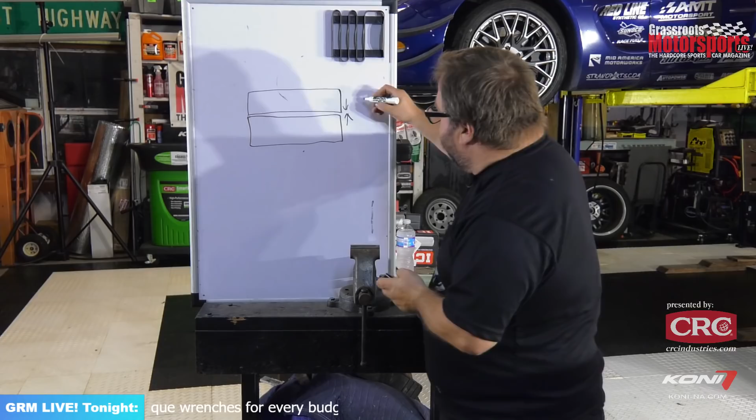I apologize in advance. The fact that I am writing things tonight is going to get fairly embarrassing for anybody that ever taught me penmanship.

So we need a certain amount of clamping force between these two parts. The trick is we can't really measure clamping force between two parts. It would require us to put some sort of measuring device in between those two parts, and you can't have that. Those two parts need to mate with each other. So how do we extrapolate clamping force?

Well, we can use the amount of torque we are putting on a threaded fastener, since we know if we've got a threaded fastener going through a hole here, our threads pulling this bottom part up towards the top part, we know based on how much torque we put on that fastener, how tightly those parts are being pulled together, within certain limitations. There's lots of variables that go into this. So having precise control or precise knowledge of the amount of torque we're putting on a fastener is paramount, because there are so many other variables.

First off, the amount of torque you put into a fastener, most of it in most cases is going to be lost to friction. I'm talking, when I say most of it, like a dirty fastener, a rough surface fastener, unlubricated - 60, 70, 80% of the torque you put into that fastener could be lost to friction. Only 10 to 15% of it could be going into clamping force. So that's not a great ratio.

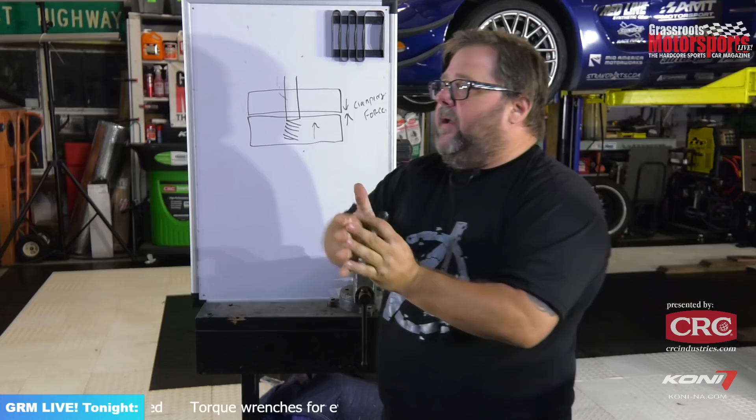Let's talk a little bit. Yep, a lot of folks saying hi, tuning in there. Kevin says lube it up. Yeah, it's never a bad idea to lube it up.

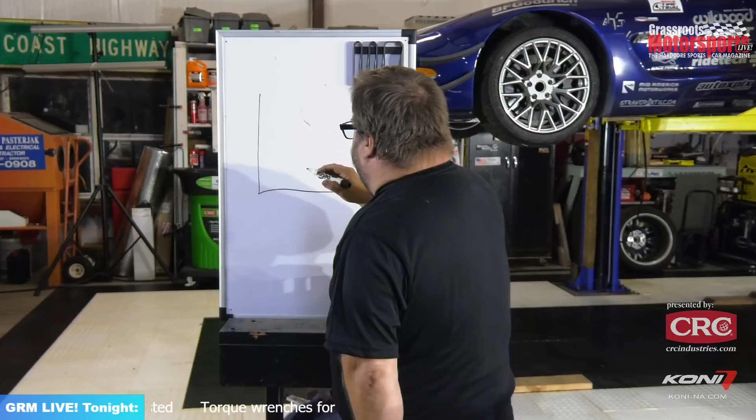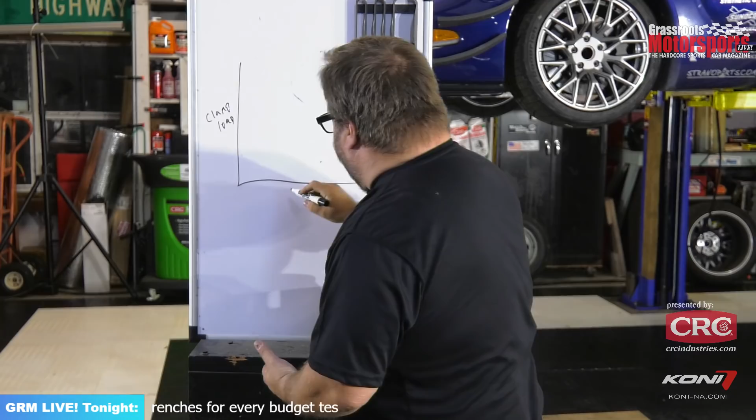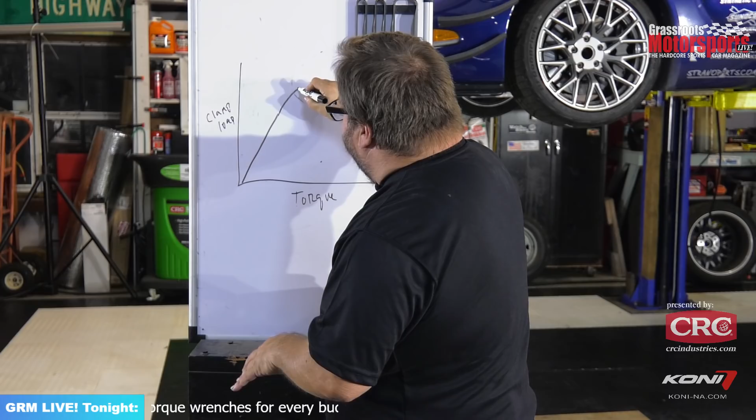So let's do a really quick review on how fasteners fail and what we're talking about when we're talking about torquing a fastener to a certain spec. So if we look at a graph, just an XY graph, where we have clamp load up here, and we have torque on the fastener here. Most threaded fasteners are going to have a curve that looks something like this. It's gonna rise fairly evenly, torque and clamp load, to a certain point where it's going to start to trail off fairly evenly. Then it's going to trail off dramatically. Then it's going to break.

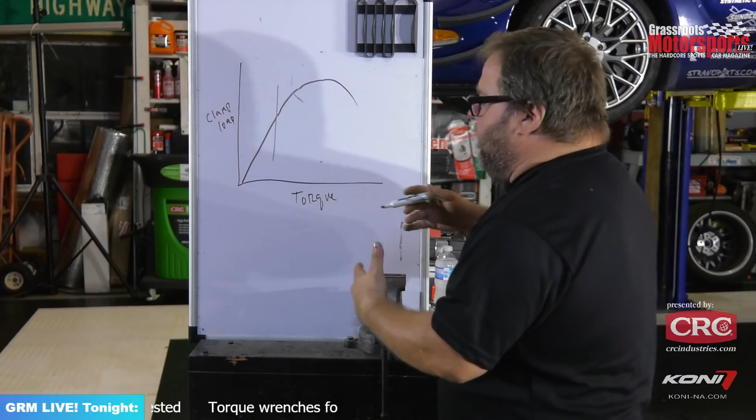So here's what's going on in these different areas. While it's rising in a linear fashion right here, while we're increasing clamp load and torque, both in a linear fashion, there's no real stretch going on in the bolt. Remember, everything is a spring. Where'd my bolt go? Everything made of any kind of material is a spring. Everything moves, everything bends, everything stretches. Everything is going to have a certain amount of elasticity to it. But in this area here, while torque and clamp load are rising the same way, there's no stretch going on that can't be recovered from.

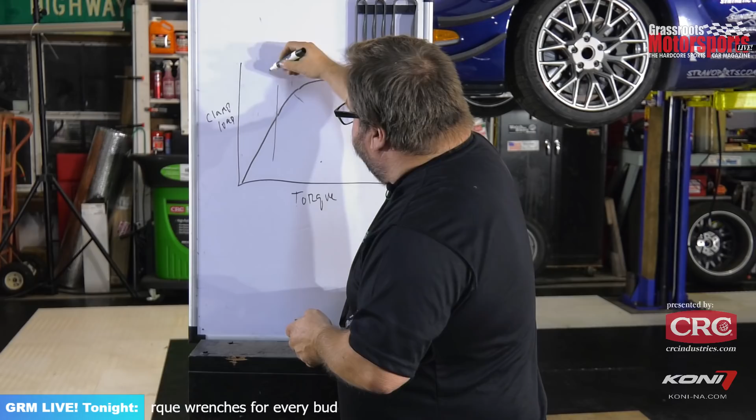So you're going to basically torque this to what's called a proof load, which is a load at which, when you remove the tension from that fastener, it'll return to its original shape. What's going to happen after that is you're going to be applying more torque to it, but your clamp load will still be rising, but the amount that your clamp load rises is going to be less and less for a given torque. What's actually happening at that point is the fastener, the bolt, is stretching, it is deforming, it is plastically deforming, and when you increase it past that proof load, you get into this area of plasticity from which that fastener is not going to recover.

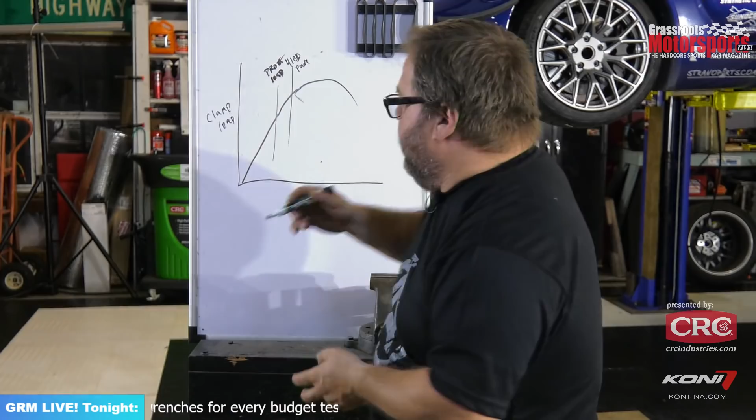You will stretch it to a point where when you remove tension from it, it will not recover, and eventually you're going to torque this past the point where this is basically the yield point, which is the point of no return for the bolt stretching past a point where it can't return to its original shape. And then you'll apply more and more torque to it, and eventually it's just going to snap. It's gonna eventually meet its failure point. So that's essentially your curve.

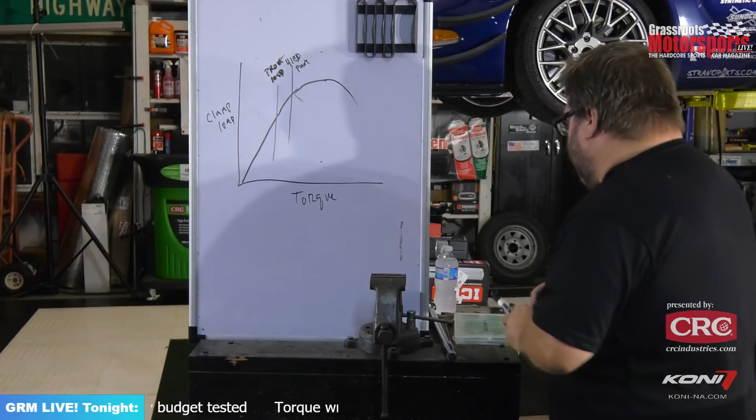Usually this proof load is going to be about 85 to 90% of the ultimate yield point. So there's a little bit of safety margin in there for being able to reuse a bolt. But again, understand that if you are reusing a bolt, understand how much torque was on that bolt, how much stress you put on it. If you exceed this proof load on the bolt, don't use it again, or don't use it again in a mission critical application. Time to replace that bolt the next time you use it.

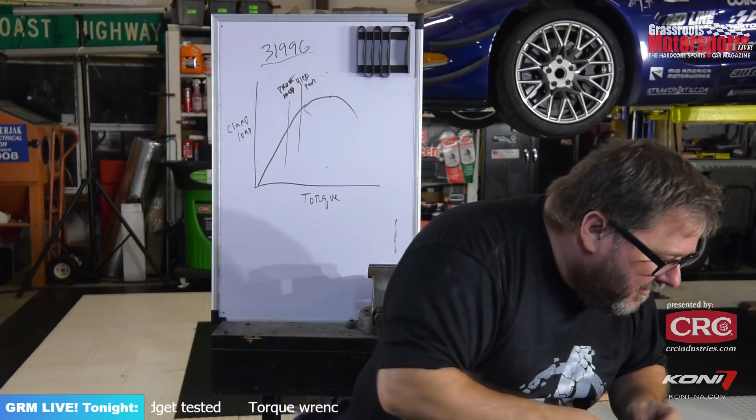Okay, let's get caught up on some of our questions here. It's mostly smart ass remarks, but we have a lot of them, yeah. Dinesh mentioned that'd be a good lesson for all those teenagers working at Jiffy Lube using impact guns on oil drain plugs.

Yeah, it's important. As I started researching for this show, I was realizing just how important it is to torque to a spec, because your torque is a second order calculation for clamping load. You're just extrapolating clamping load through torque. So the more you screw up torque, it's going to have magnifying effects on the thing you're actually trying to measure.

All right, so let's get into some of these wrenches.

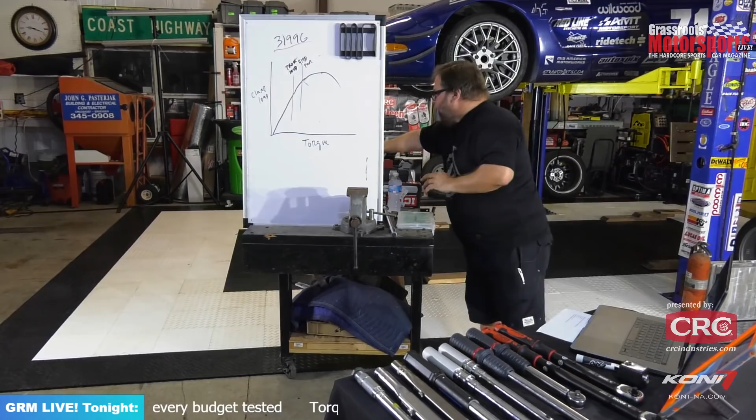I see Jesse Spiker is watching. Jesse, we are taking good care of your Precision Instruments wrenches that you loaned us for the evening. We'll get to those in just a few minutes.

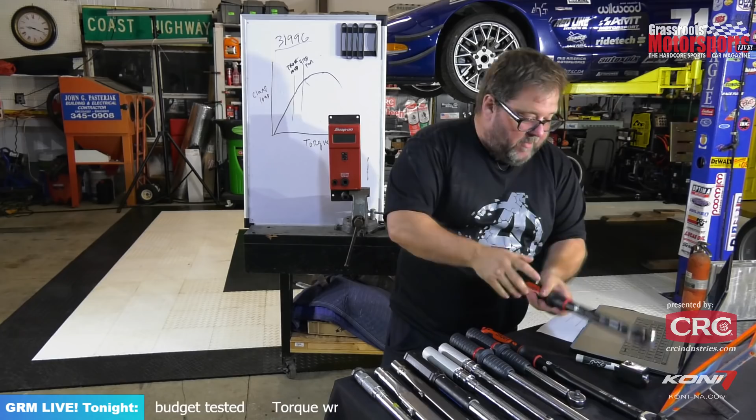But let me run you down the lineup of stuff we have for you tonight. We'll get our test doohickey in place. We've got wrenches from about 5 different brands here, starting out with some from Sonic Tools.

These we've chosen, for the most part, 3/8 and 1/2 inch torque wrenches for all these examples. Let me get my handy dandy information sheet out here so I am quoting you actual numbers. Sonic 2-way torque wrench, 3/8 inch, 20 to 100 Newton meters, is 180 American dollars. Sonic 1/2 inch, 40 to 200 Newton meters, $190.

USAG is the next brand. These are available through Griot's Garage. USAG is an Italian company and makes a lot of high-end tools for motorsport over in Europe. These are through Griot's Garage, 3/8 inch, $269.99. For the 1/2 inch, $274.99 for the USAG.

We'll get into some of the features of these individual wrenches as we go through. I just want to run down what's here.

Next up is a brand called Icon. You may have heard a little bit about these. This is Harbor Freight's premium brand, their high-end brand. They are actually trying to compete with some of the commercial grade stuff. The 3/8 version of this Icon wrench at Harbor Freight is going to run you $89.99.

I know that because I just bought this one 2 days ago. And the bad news is you cannot use those great 20% off coupons from Harbor Freight on these, as it's one of their premium house brands. But it's a nice feeling wrench, and we'll give you the test results on those. The 1/2 inch Icon from Harbor Freight is $99.99.

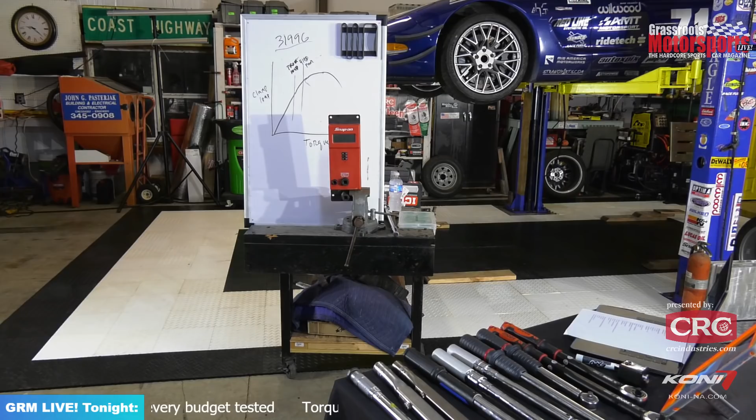What you see there is a spring, and the spring is holding, sometimes a detent ball, sometimes a square edged piece of material, and there's a secondary hinge on the device right here. That's what this pin is for. It's actually internally hinged, and that hinge is based on the tension of a detent ball or detent pin that you have to overcome torque to break free.

So that's why you get the click. It actually momentarily releases the torque from the wrench when you overcome the torque of that detent ball. So when you adjust it, all you're doing is preloading that spring. The good news is that also makes it fairly easy to recalibrate these.

You put a different weight spring in, you shave the balls down a little bit, you polish off the end of the detents. Probably it's mostly by shimming or replacing the spring, but that's how a clicker style torque wrench works.

Now here is how a split beam style torque wrench works, which is what these Precision Instruments ones are. Same concept, you're essentially overcoming mechanical leverage to release the head of the wrench.

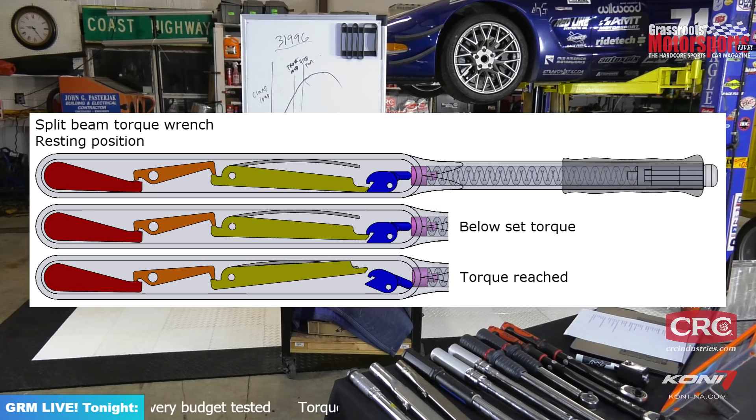There's a few different designs, but the split beam style uses, instead of just a single beam hinged at the head, multiple beams that actually amplify the torque a little bit, and the result is much smoother operation when that finally breaks free, and much less preload on the spring.

So these Precision Instruments split beam style have just a very easy adjustment. It's almost like winding a watch. It's very easy to adjust the torque on them.

Is one better or worse than the other? The real answer is they're both pretty good at what they do. It's really going to come down to the precision and the assembly of the pieces involved. There's different ways to skin a cat, it's just how sharp is your knife when you skin that cat.

All right, we are going to take a quick break here, by which I mean I'm going to still be standing up here, I'll just be talking about different things for a couple minutes. When we come back, we're going to actually test some of these, and I will come to some conclusions on which of this particular lineup we have in front of us I would maybe spend some of my own money on.

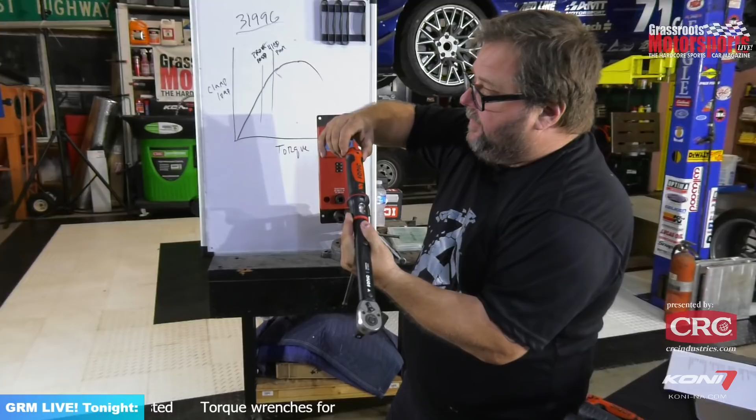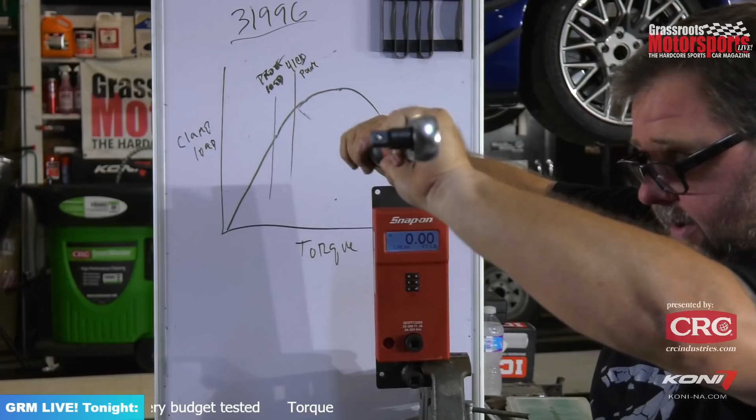Let me show you how we test these. Put a little adapter here. I'll set this to show you how the lock works. Sonic is very easy to adjust: pull out the lock, twist the preload handle to whatever torque you want. It's a little tricky to read. If I had to nitpick it, I'd say the gauge on this is a little tricky to read.

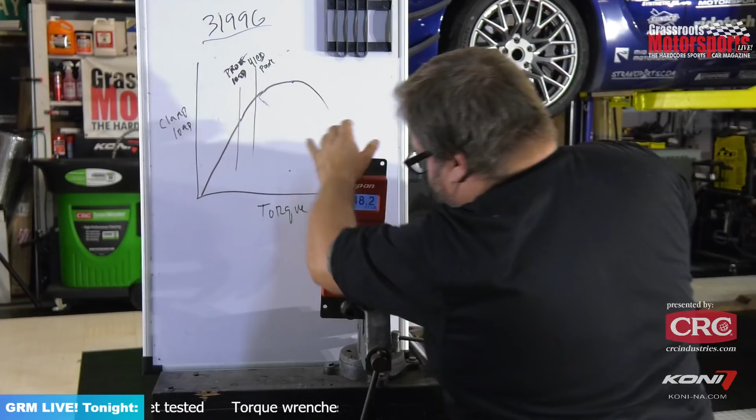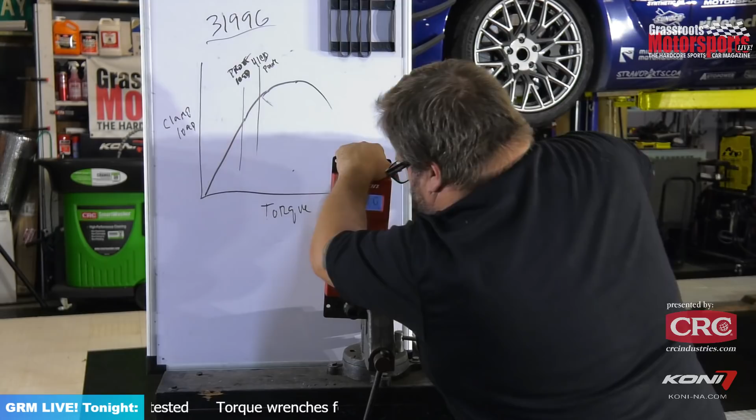But it does seem well weighted and lines up nicely, so we'll set that to 50 pounds, insert it in there, and twist it till it clicks. Set to 50 pounds, we got 49.4, then 48.2 — I think we missed on that one. We'll wait till it recycles. We got 48.1, then 48.1 again. So we're very, very repeatable, but actually a little bit lower than what we were measuring last night when I was doing the testing.

What are the variables involved in that? Well, temperature is possibly one — it's a little cooler now than when I was testing last night. We're seeing about a 0.5%, almost a full percent difference in some readings compared to last night when it was 15 to 18 degrees warmer. So there is some variability in there.

A question we get frequently, and one thing people kept asking me as I was researching this: does it matter if I put an extension on there? Does it matter if I put a universal on there? I'm no engineer, but in the limited testing I did, there doesn't seem to be a big difference in what we saw.

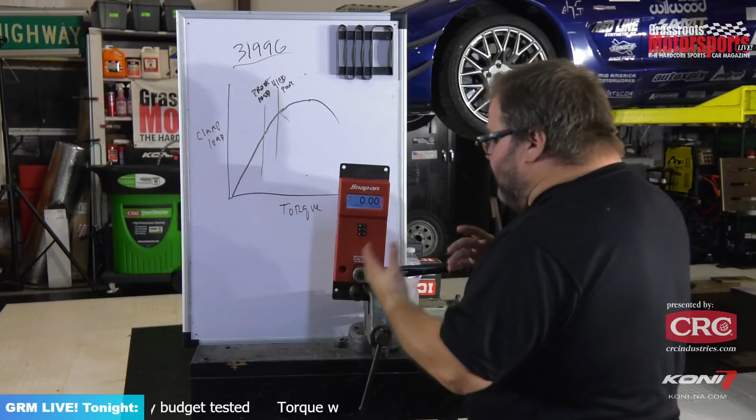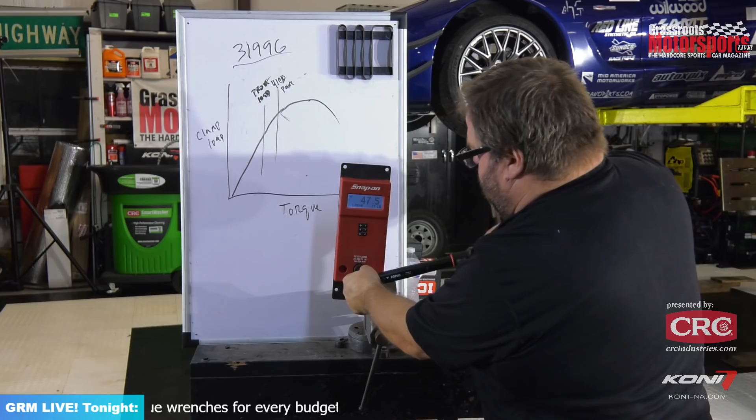So first, let's grab about a 4-inch extension here and put it back in. It misses every once in a while, but we got 48.1, which is exactly what we were coming up with using just the wrench itself. So we're within margin of error with a 4-inch extension.

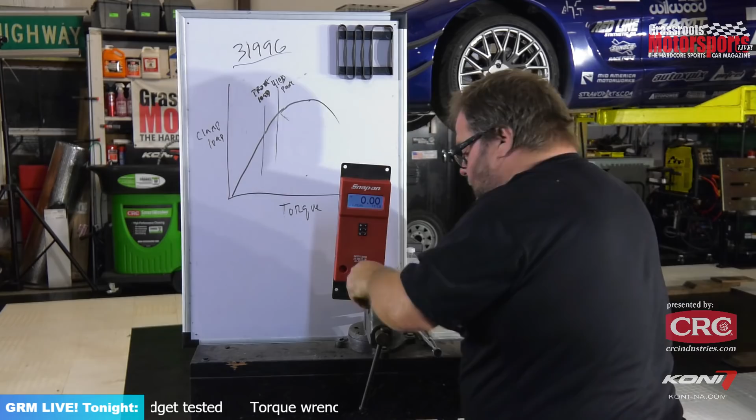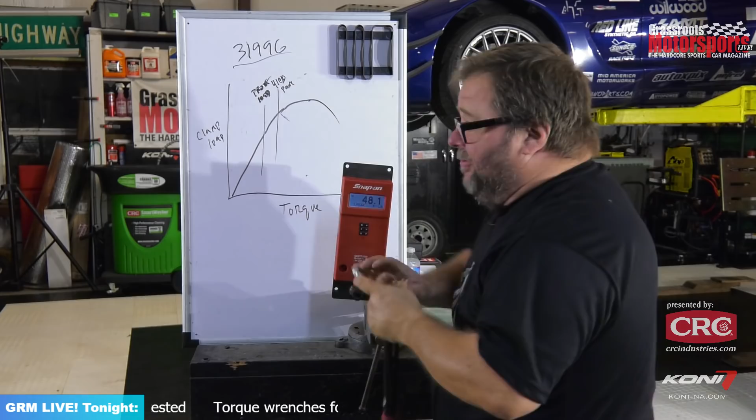Now I'm going to add a universal to it. Oop, or maybe not. Get on there, you piece of crap. Okay. So that's with a universal and an extension, and we're seeing essentially the same numbers: 49.1, 49.3, 48.1. So to answer your question, does it matter if you put a universal and an extension on there? Maybe not so much.

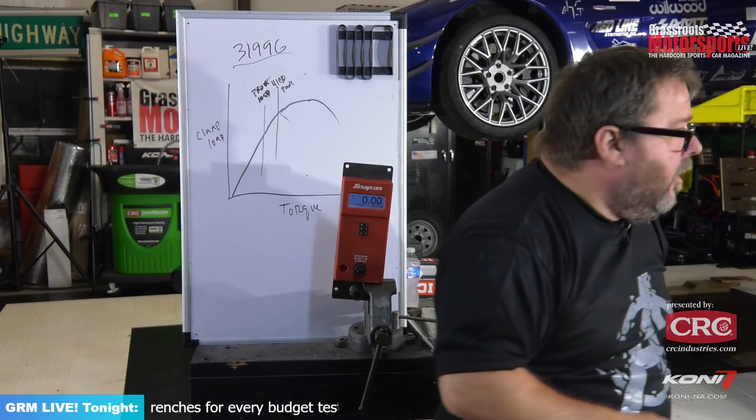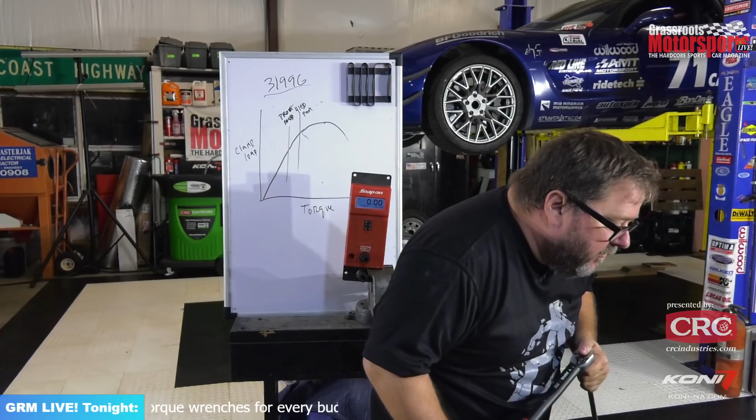Let me grab an even longer extension — I'll get the longest one I have in the drawer. Benjamin says from a static perspective, no, it shouldn't matter as long as it's straight — the moment arm remains the same. So basically, as long as everything stays straight and the angle is exactly the same, none of what you put on there should matter to your ultimate torque.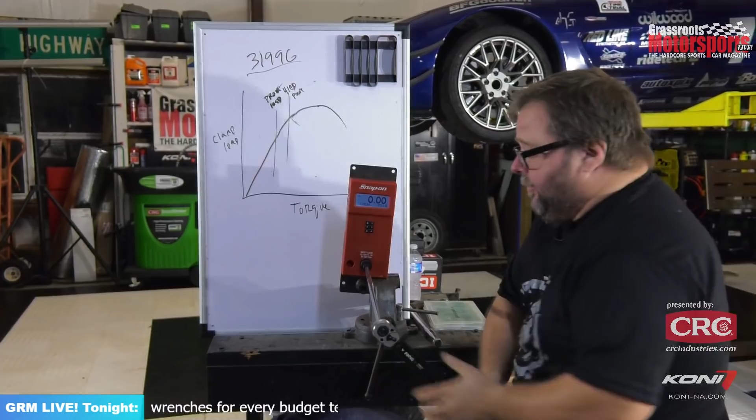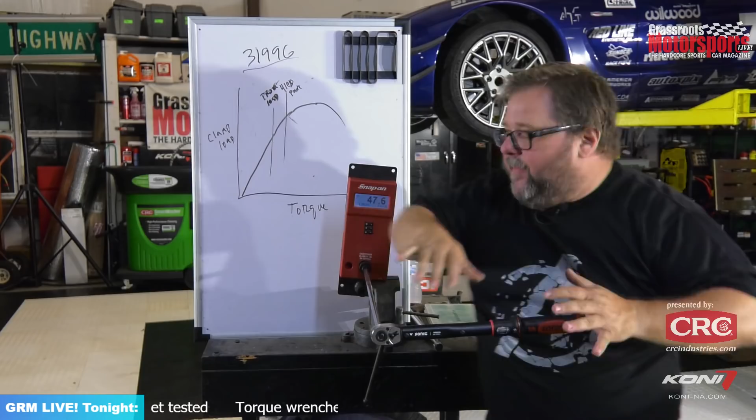Here's what it does matter to, though: it matters very much to feel. With an extension this long, like a 14-inch extension, the amount of flex you get before the wrench triggers is considerable, so timing that release point becomes fairly critical. You have to sneak up on it and then hit it. You can see we're varying here on our readings — that's not really the wrench, that's more me than the wrench. It's taking some feel.

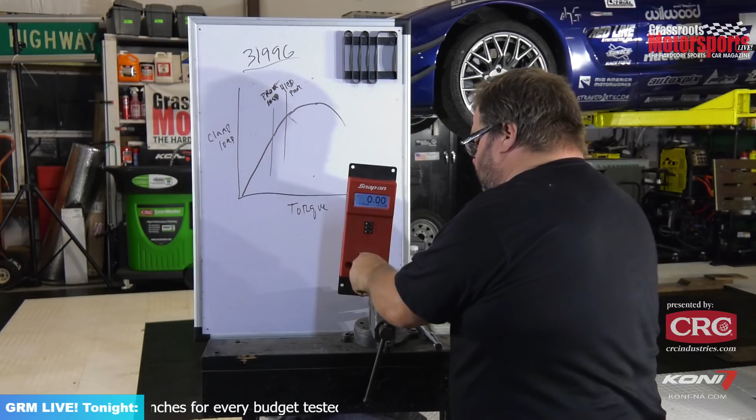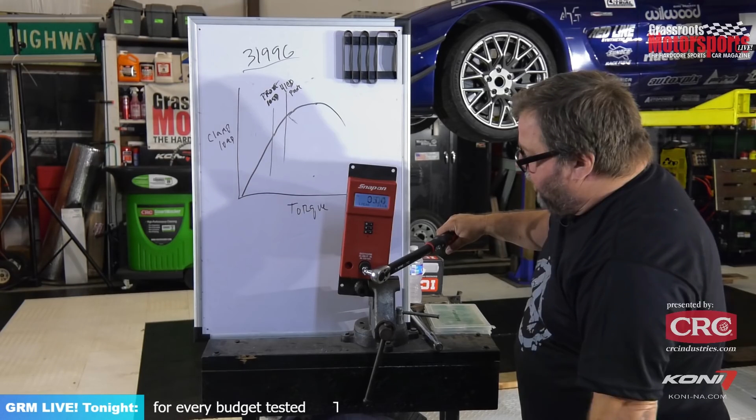Where it is going to matter is when we start creating angle with a universal. So let me get our universal stuck back in here, and if we put this at about a 45-degree angle, you see how much we lost right there — we lost almost 30% at a 45-degree angle.

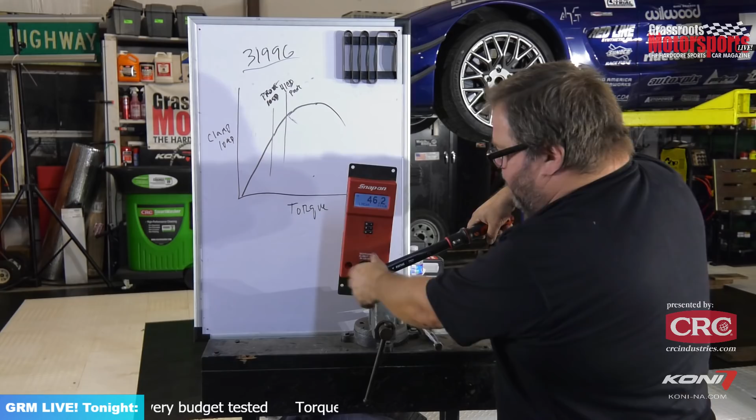We'll eyeball this to about a 10-degree angle, see what we lose. Less, only about 8 or 9% at a 10-degree angle. But considerable at a 45-degree angle.

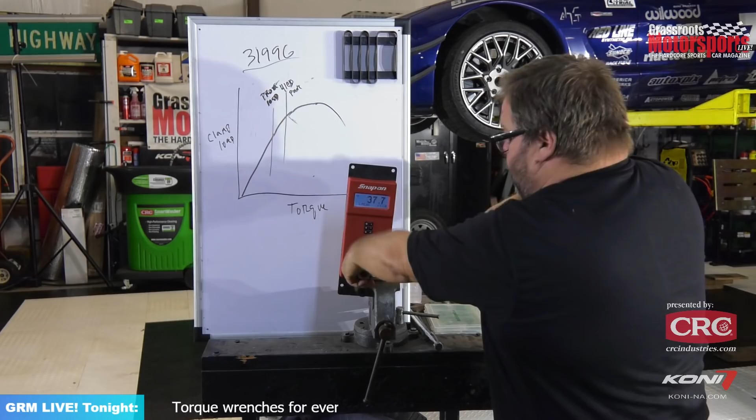So does all this crap in the middle matter? If you start changing the angle, yes, it absolutely does. If you don't change the angle, mathematically it doesn't matter.

From a user perspective, yes, there definitely are effects when you start using this stuff. So that was our test methodology for all these. I'm not going to walk you through testing on every single one of these wrenches, but I am going to go through the rest of these wrenches and some of the features very quickly.

The Sonics, both of them, like we mentioned, great locking mechanism at the end, very, very difficult to adjust it accidentally. It's kind of hard to pull that out with the heel of your hand if you're using it. Very positive lock. Also, really, really cool feature, reversing anvil on the head there.

So why does that matter? Well, a torque wrench will generally have different readings whether you're torquing something clockwise or counterclockwise. And you're not going to often torque something counterclockwise unless you've got reverse threaded bolts. But most torque wrenches are not calibrated in both directions to an equal amount. If you look at the specs on many torque wrenches, they'll be accurate to within a certain standard clockwise, possibly a different standard counterclockwise. This lets you basically torque accurately in both directions. You just reverse where the anvil comes out of the head. So, nice little function there.

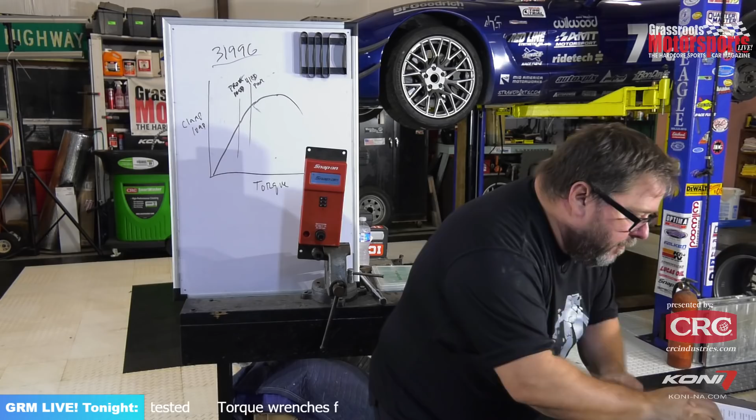Great point there, Steve. Steve Goff posted that torquing in reverse is important for testing stuff like breakaway torque. So yeah, when you're doing reliability testing, if you're rebuilding a differential, torquing in both directions becomes important for that.

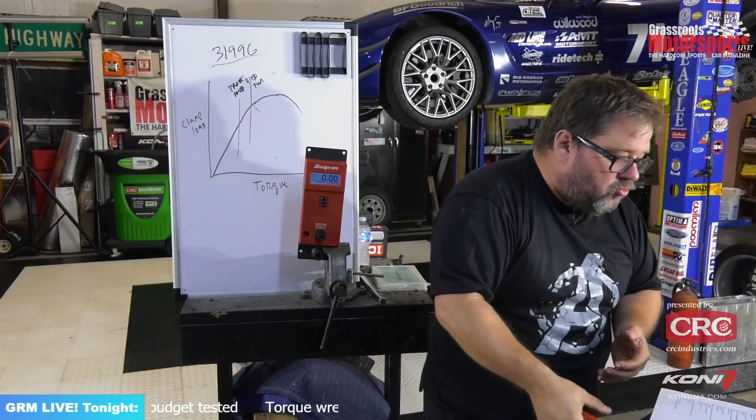Okay, see where we're still at. The half-inch Sonic, where were we at in price for that? $190 for the half-inch Sonic. Very much like the 3/8, features are all the same. You have the reversing anvil. Build quality also very nice. Same locking mechanism on the end.

Again, if I'm nitpicking the Sonic, it's that the window here is a little bit tricky to read. Foot-pounds are on the bottom, Newton meters are on the top, and both of them are sort of in the area where the glass bubbles a little bit, and they're just not the easiest things to read.

Let us move on to the USAG wrenches. These are available from, among other places, Griot's Garage. They are a little spendy - $269.99 for the 3/8, $274.99 for the half-inch. I will pull up the specs on these.

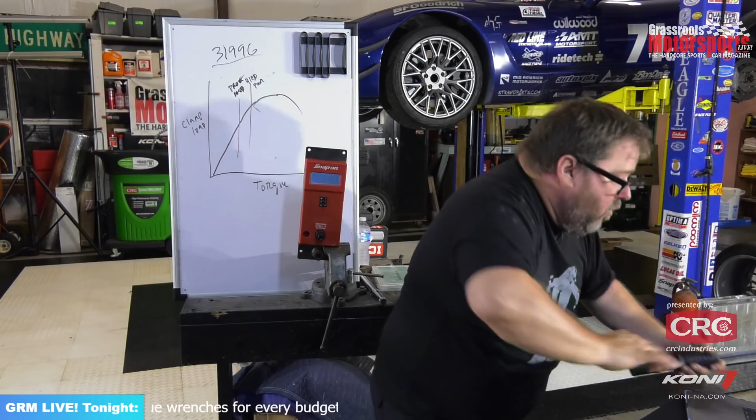So USAG wrenches. First caveat on these is we were not able to test at 75 foot-pounds on the 3/8 because this particular version does not go up to 75 pounds on the 3/8 version. So we tested at its maximum torque setting, which was 37 foot-pounds for the 3/8, and we were within 2% on that. At the 25-pound level, we were within 1% on that. So I believe these guys claim 4% accuracy.

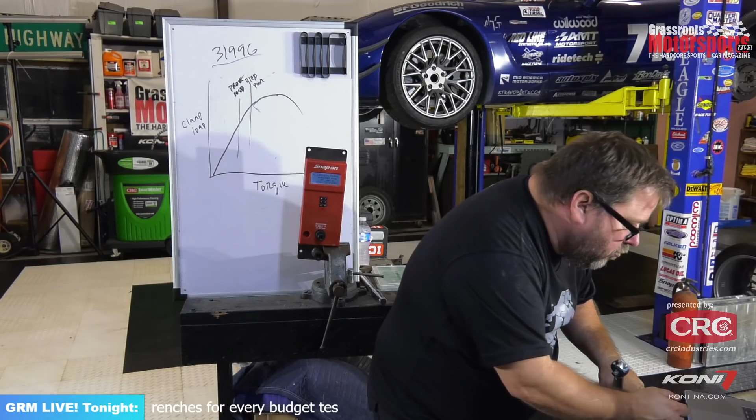Yeah, their claimed accuracy is within 4%, so they are beating that handily, 1% to 2%, so they're doing great on that. With an extension, we're looking at about the same numbers. Yeah, within 2%. There was nothing beyond 2% on any of these.

So let's talk about features a little bit. My big nitpick on these USAG wrenches is the fact that they are only calibrated in Newton meters, and Newton meters are great if you're European or Australian or anything but American. Unfortunately, I was raised in a world where foot-pounds were everything. At some point, I guess I could recalibrate my brain, put up a chart and do all the math, but I was raised in foot-pounds. Doesn't mean I'm a good person or a bad person, it just means that's where my frame of reference is. And having to add an extra step at 49 years of age and figure out what Newton meters actually means - I want to be a foot-pounds guy, so that's my only real complaint with these.

The gauge is incredibly easy to read. The adjustment is great. Nice locking collar on this one. You pull that collar down and it adjusts very, very easily. Everything's very, very easy to read.

It's just in the wrong calibration for my American sensibilities. Same thing with the half-inch version. Same great locking collar, same most readable gauge of any of these wrenches.

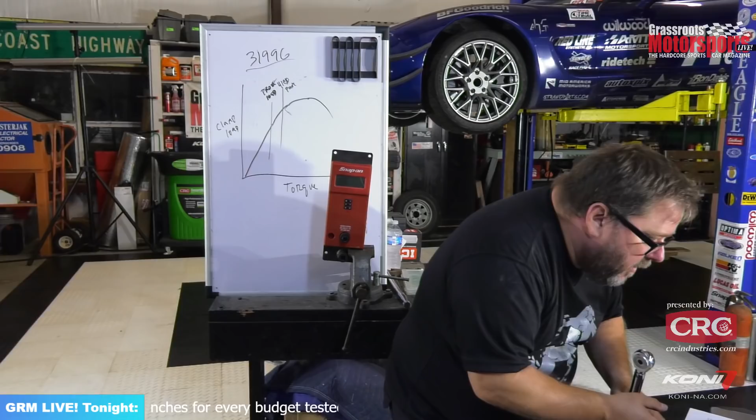The half-inch USAG wrench was within 2% on all of its measurements. We had one flyer though on the half-inch USAG with an extension and a universal. It was high actually on both 60 foot-pounds and 120 foot-pounds. We were getting readings a little bit higher than that with accessories attached. Aside from that, within 2% on all its tests. They claim within 4%, so they are beating that handily as well.

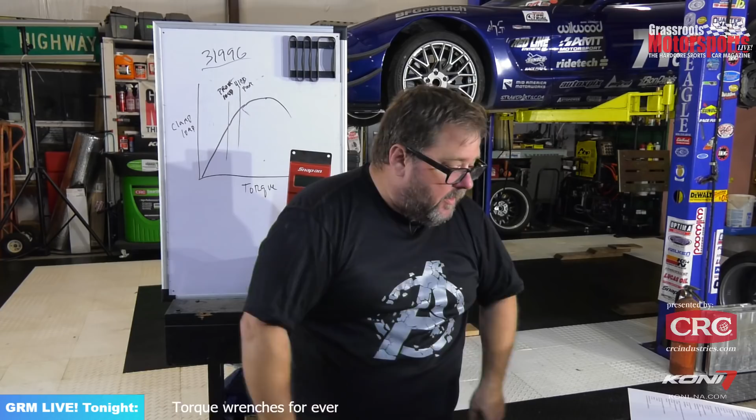Let us move on next. Just going over, seeing if I missed any good questions here.

So yeah, our friend Steve from Honda says they use Newton meters on their U.S. design and built race engines for all their Honda race cars. Good for you, man. You know what? One day I'm going to learn to speak German and Spanish fluently, and one day I'm going to figure out Newton meters. Today is not that day.

Let us move on to the Icon wrenches. These are available at Harbor Freight. They are not eligible for any of the Harbor Freight 20% coupons. This is sort of Harbor Freight's premium house brand. Really nice ergonomics on this one. This is an all metal wrench. I tend to kind of like an all metal wrench. These plastic handled ones from Sonic and USAG, they're very, very comfortable, but they're going to get dirty fast, at least in my world. If you're somebody that always wears gloves, always wipes your tools down constantly, works in a very clean environment, these will last a lot longer. For my habits, an all metal wrench tends to stay cleaner and stay nicer longer.

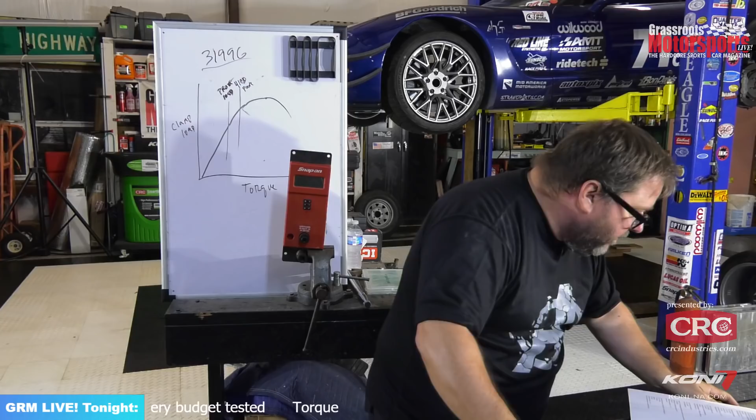Same or similar style locking collar design to the USAG, so one-handed operation is fairly easy. Nice smooth operation, 90 tooth gear set in these, so it's very nice and smooth, and the accuracy on the Icons was actually fantastic.

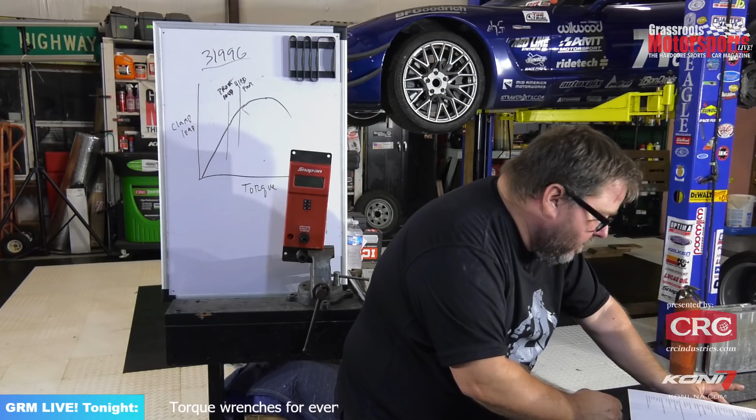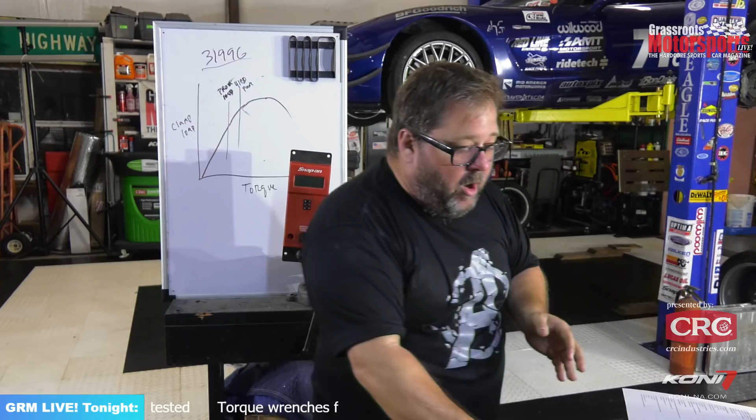We were on the 3/8. It was dead nuts on, less than 1% variance with and without extensions on both of our tests. Actually, its biggest variance was at 75 foot-pounds, it was a full 1% off.

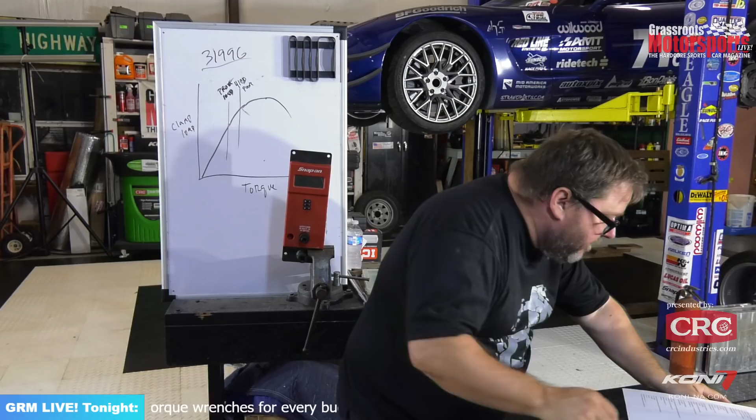Same locking collar, same dual calibration, foot-pounds on the back, Newton meters on the front. And the accuracy for the Icon 1/2-inch wrench only was within 1%, 1.5% at 120 pounds, within 1.5% with a 6-inch extension, and within 2% with an extension and a universal. So they claim 4% in the clockwise direction, 6% in the anti-clockwise direction. So all of our tests were within 2% on the Icon.

Let us take a look now at Jesse's split beam torque wrenches.

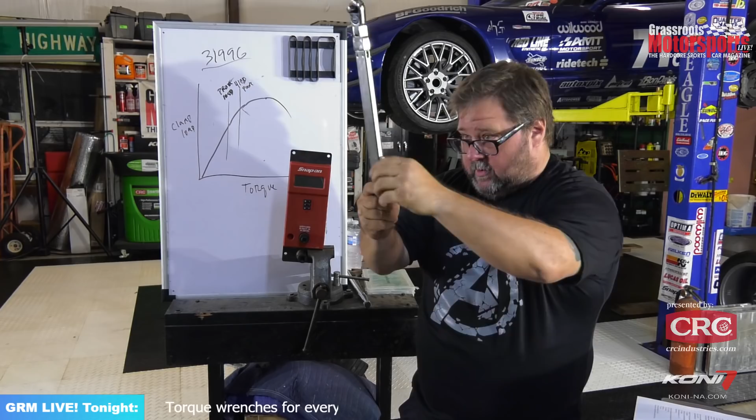Best thing I can say about these, and they are fantastic wrenches - these are the Precision Instruments split beam click wrenches. The adjustment on these is absolutely world class. That is the advantage of a split beam wrench, is the adjustment is very slick. There's no preload, and the release on these is really fantastic. I'm going to set this one to just kind of eyeball it to about 30 pounds.

Oh, hang on, I think I missed a YouTube question here. Let me walk over and scroll up. Somebody said that's a great question, and I think I just flat missed what the great question was. Who calibrates the calibration machines? Yeah, that is something I have been wondering the entire time I have been doing this. And when I wrap this up, I think I'll give my thoughts on that.

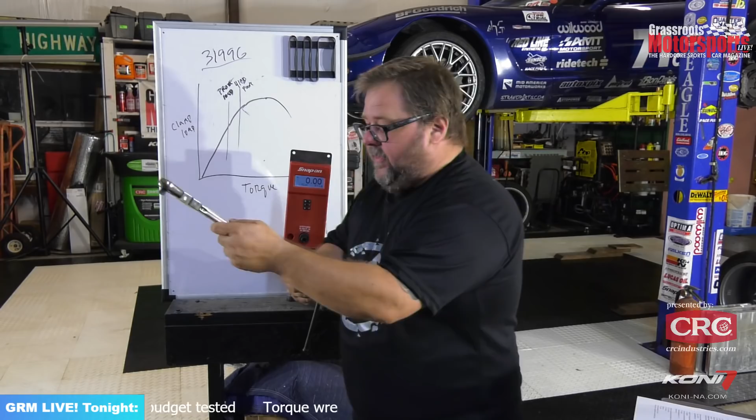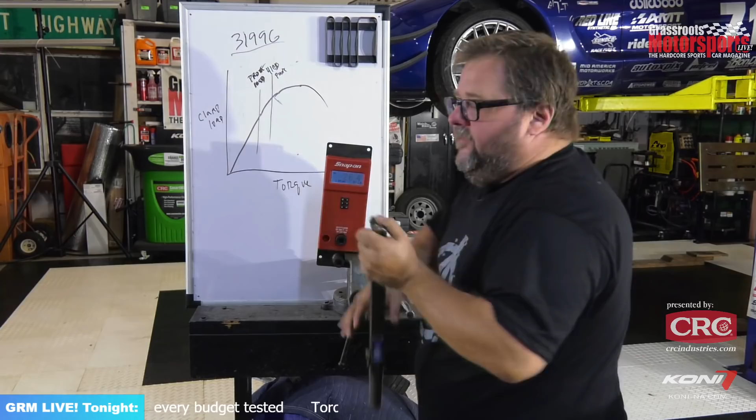So yeah, we got this set to a little over 30 pounds. I'm not sure how easy this is going to be to perceive for you, but the release on this split beam wrench is just absolutely fantastic. It's got a very nice tactile feedback. It actually momentarily releases the torque, so you never really worry about over torquing something. And it does have these nice swivel heads.

Unfortunately, the precision on these was not as great as some of our other ones. Jesse, sorry.

Maybe time to go get your wrenches tested. There was a lot of variation in these.

The 3/8 was within 3% on both its tests. The 1/2-inch varied by as much as 5% on most of its tests, and it normally read high. So if we set it to 120 pounds, it would show up 124, 125 on the test machine. There was as much as about 5% variance, and it was consistently high for the 1/2-inch. Now, there was not more than about 2% variance in how high it was, so it was consistently 3 to 5% high. It was never 2% low and then 5% high, so it read very consistently throughout its range, but did consistently read a little bit high.

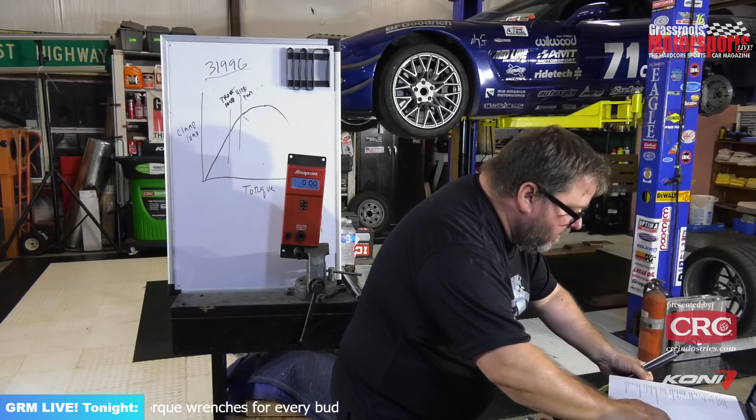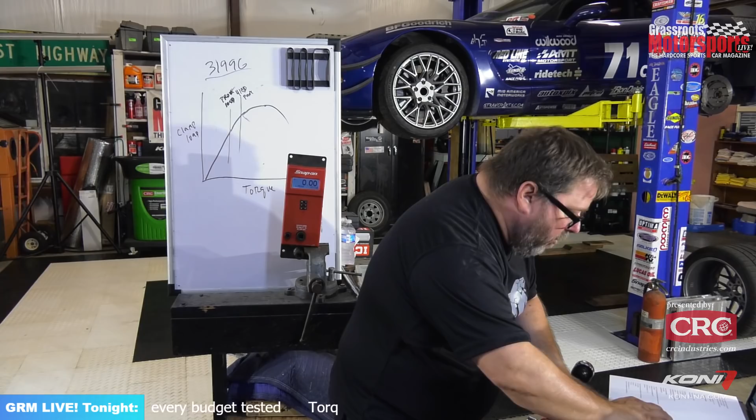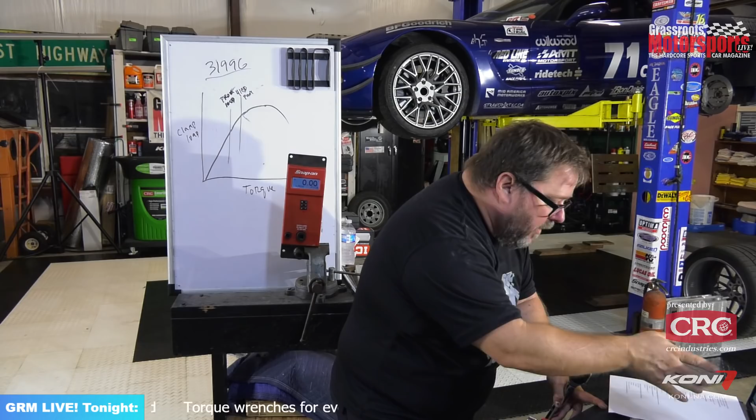So the variance, we only had a 1/2 inch, so we only tested at 60 and 120 pounds. It never varied more than 2%. We were never more than 2% off of the actual desired torque. Well, okay, no, there was one test at 120 pounds with an extension and a universal where we were 3% off.

$20, and you're maybe 1% or 2% worse than the rest of these. Not quite as precise as the high-end stuff, but pretty darn good.

So I think what that means, and this is what I've done with my life, I got these things everywhere. They're in my trailer, they're in my truck, they're anywhere I might need a torque wrench, and I don't care if I lose it, and I don't care if I have to use it as a hammer or as a weapon or as just something fun to throw at a street sign. These are disposable and surprisingly accurate devices. For the shop, I'm gonna get something a little more consistent.

Now, somebody asked earlier, who calibrates the calibrators? That's a great question. Actually, Mark is answering that. When he worked at IBM, the U.S. government weights and measures calibrated theirs for weights and volts. So the real answer is, I don't know, but there are agencies that do that. There is always somebody up the food chain who's going to monitor the performance of this stuff, even if it's Snap-on monitoring all this stuff in-house.

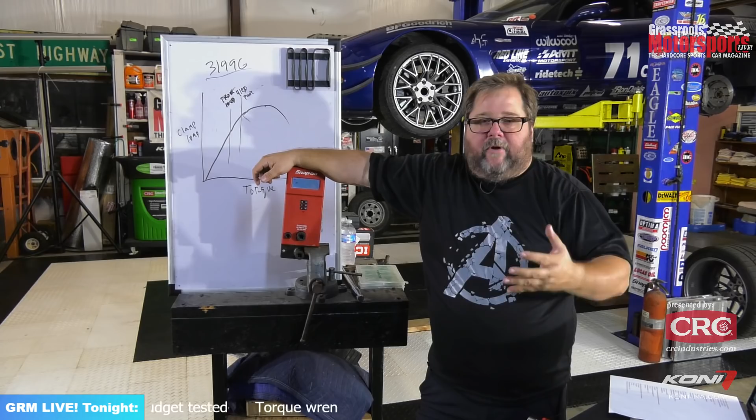So the question is not necessarily who calibrates the calibrators. The question is, who do you trust the most? And the real answer to that, I think, is consistency is going to be just as important as accuracy. If you've got a torque wrench that you trust, get it tested every year, get it tested every 6 months, find a service period that you're comfortable with. Get it tested consistently. Build a chart of indicated torque versus actual torque, and use the same tester every time. Use the same test methodology every time, and build repeatability. Exercising that repeatability is going to make up for possibly any lack of accuracy.

So we have got to make a decision here on which one we are going to buy.

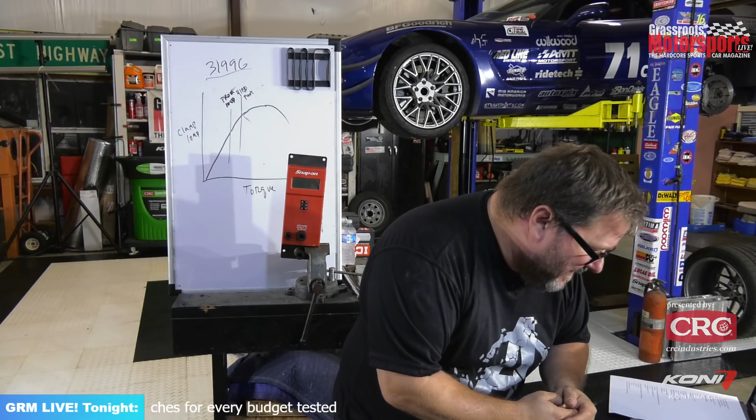Dinesh says, Florida man arrested after knocking over signs with torque wrenches. That's actually, you knock over a couple signs with a torque wrench in Florida, you're going to be like mayor of Chattahoochee. That's just how it works around here. And Steve says a hammer is everything, and everything is a hammer. We actually have a thing called Schroeder's Law, coined by the late great Paris Schroeder, who's still alive. He just works somewhere else now, so technically he's not late. But basically that law is any tool from Harbor Freight will eventually become a hammer.

They've added this great high-end icon stuff, and it's pretty sweet. Oh, let's get into the digital one.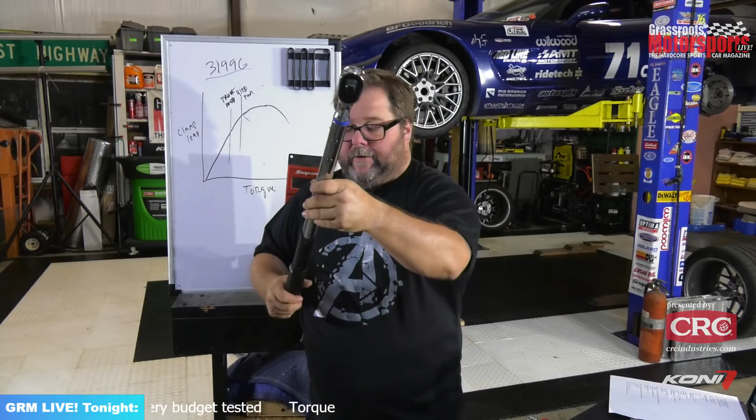Okay, digital torque wrench from Lowe's. $200, great in your hand. This is fantastic right up until the moment that you actually have to use it. Let me show you how this baby works. Now I will show you why I am not really recommending a digital torque wrench for you.

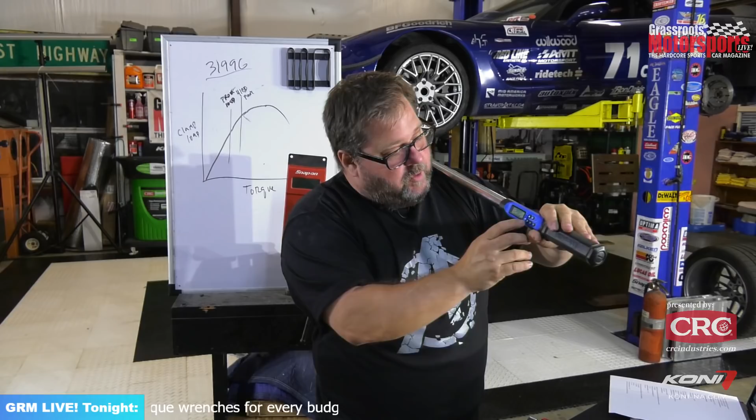So great way to adjust torque on this thing. Let's set it to 80 pounds. Okay, so this baby's set to 80 pounds. We'll turn our machine back on, let it zero itself.

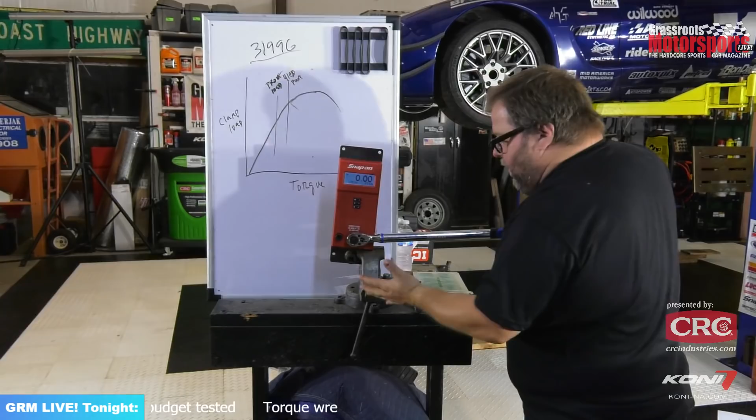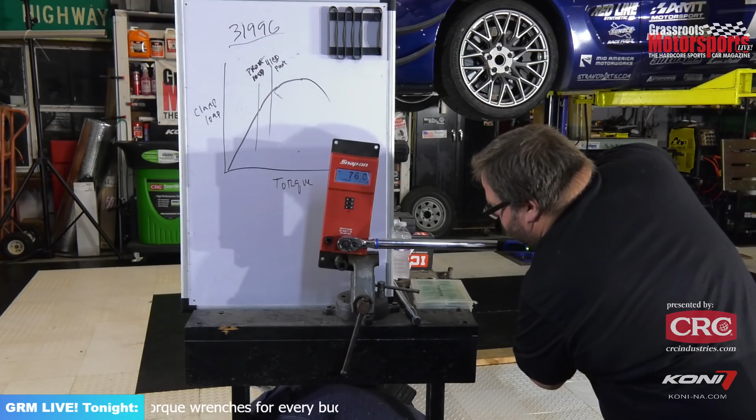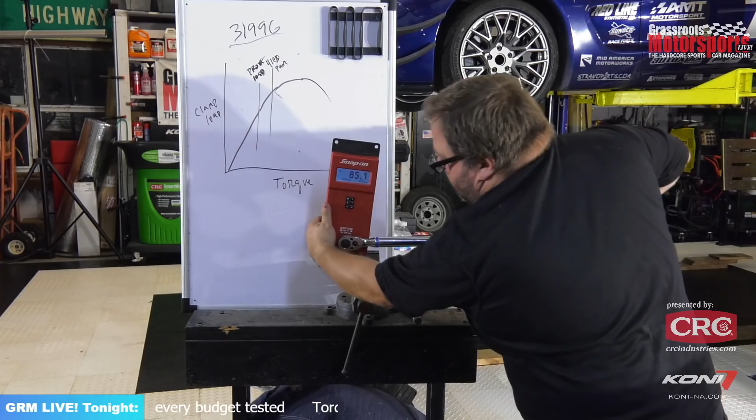These click type torque wrenches, whether they be the detent ones or the double beam, actually momentarily release the torque on the fastener. This one does not. So it is very, very easy to over torque something just by leaning on it a little bit further. It's also easy to under torque something by sneaking up on it too slowly. It's very, very hard to be consistent with this thing.

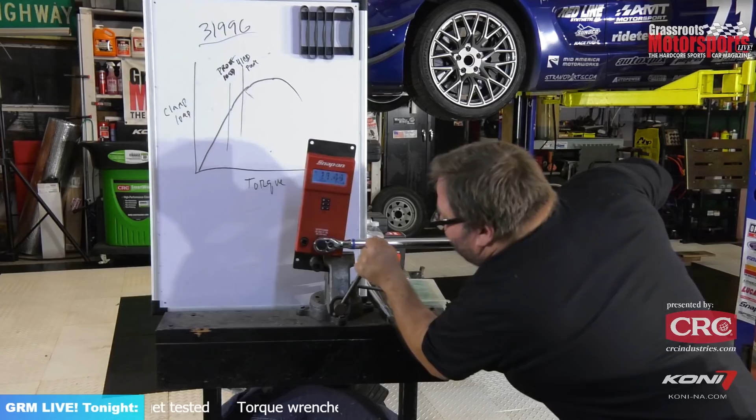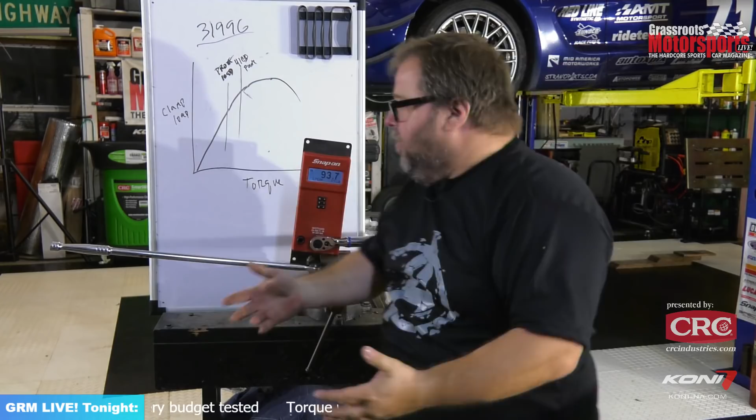If you're not paying 100% attention to it, the tactile feedback of these click types is far superior from a usability perspective than that. Yeah, it sounds cool, it's beeping, but I'm all over the place with this thing.

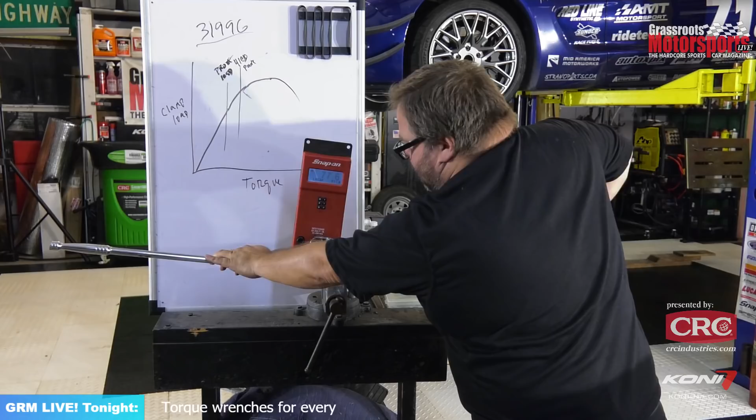I didn't even get to the beep. It's like skee ball. It's incredibly frustrating because you're constantly sneaking up on this target that only gives you an audible signal, but you're still able to put torque on the thing. So yeah, it is incredibly frustrating.

I'm not a fan. I am simply not a fan of the digital torque wrench, even though everybody at Lowe's was very nice. I'm probably going to return this. Don't tell anybody.

Dinesh says it's basically a noisy breaker bar. Harbor Freight has, for $28, a tiny version of the Lowe's digital torque wrench. Works about as well. If you've got to have a digital torque wrench, just go buy one of these adapters.

Accuracy-wise, again, it was all over the place. When I got good at it, when I actually practiced for a while, I was able to get within about 2% pretty consistently with the Lowe's digital torque wrench. I shouldn't have to practice to use a torque wrench. I'm not that big of an idiot.

So let's make a decision here. Lots of things to like about all of these. The ergonomics of the premium brands are really nice. Build quality is also really nice. The accuracy across the board on all of these, though, is very, very similar.

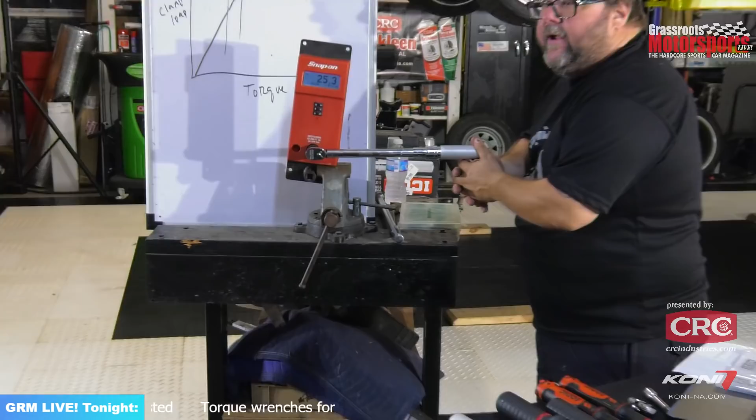I got it set pretty low so you can actually, Chris, zoom in there and they can actually see the bar break a little bit. Look at that smooth zoom. So you can actually see the bar breaking away from the head.

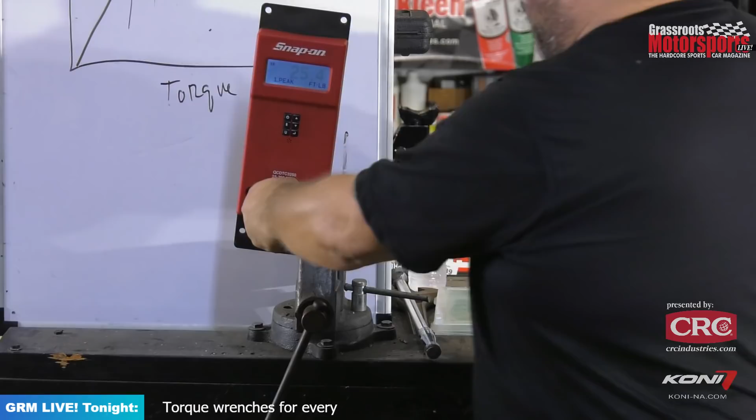So what that's doing is it's not only telling you that you've reached the desired torque, but it's momentarily removing the torque from the fastener, which again is why I like a manual, click-style analog torque wrench more than those digital ones. So yeah, if I'm picking a winner, I am picking these Icons all the way, both price dependent or price independent.

If I'm picking a runner-up, I am probably going to go with these Precision Instruments, because the action of the double beam is so satisfying. It's very smooth, especially in the smaller size. There's a nice balance to this tool. There's just a really, really nice breakaway, even more precise than the Harbor Freight breakaway.

Can't really see it as much, but the way it feels in your hand is very satisfying and very positive. So this would definitely be my pick for a runner-up. But I gotta tell you, I'm impressed. I am more impressed than I thought I would be.

Go to Harbor Freight, unironically, and pick up some of those Icon wrenches.

Mark wants to know how much is the calibration tool. I looked it up and found all kinds of different prices for it. I saw a couple of used ones on eBay for $250 to $300. New ones I want to say $550 to $700. So I think $550 is the retail. Well, we threw a link up.

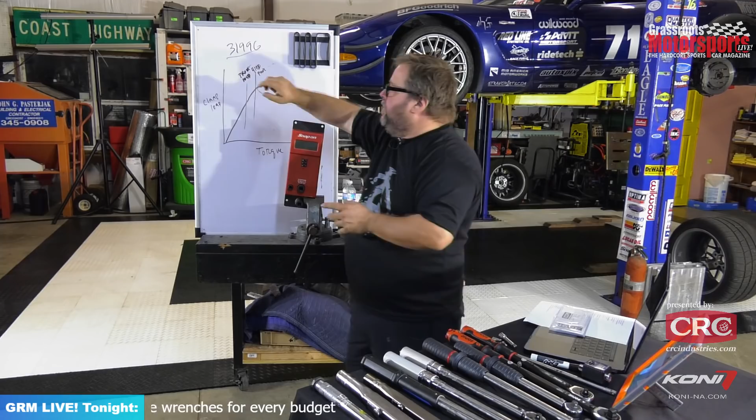I just got invited and accepted the invitation to go drive the new Toyota Supra in just a couple of weeks. So I will be reporting live from that event as well. We'll have video features and live coverage from the press launch of the new Supra.